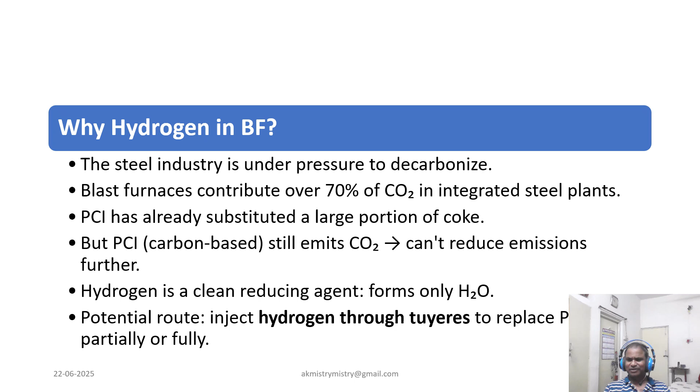This is where hydrogen comes in, and it's a clean reducing agent that forms only steam. The big question is, can we inject hydrogen through the tuyeres instead of coal and still run the furnace reliably? So this is a real challenge, and for this the study outcome is very important.

Now let's see what this study aims to do. This study focuses on one goal, which is about determining the maximum hydrogen that can be injected to replace PCI without compromising the furnace thermal or operational stability, because stability is all important when we start putting hydrogen.

It looks specifically at key parameters like flame temperature, top gas temperature, and internal reaction condition. These three factors become very important. So simulations were used to predict not just process changes but also the impact on emissions. The study assumed that coke rate and hot metal productivity are kept constant.

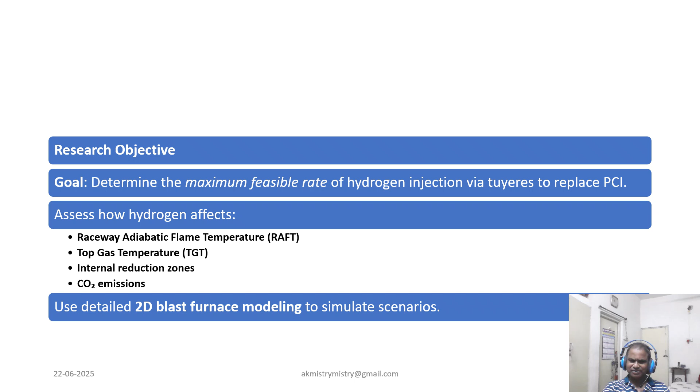Now coming to the methodology, the execution part of this project. So methodology in simple terms, we can say that this relies on two modeling tools. One is a heat and mass balance model to understand the energy and gas flow inside the furnace.

And secondly, a 2D global blast furnace model simulated the internal behavior like gas composition and the reduction of iron ore across the furnace cross section. So both activities together provide a detailed understanding of how hydrogen behaves inside the blast furnace.

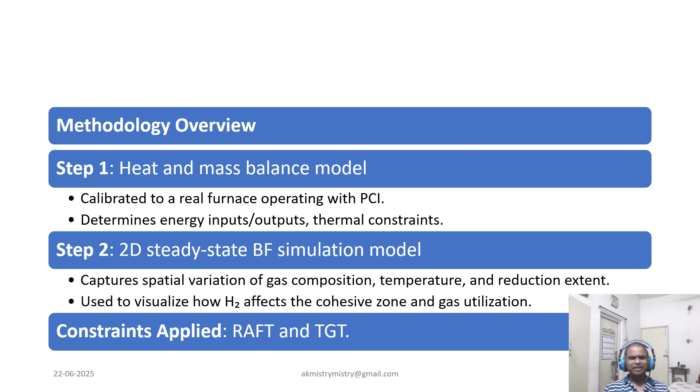Now coming to the matter of the constraints, two key parameters were monitored as constraints. One is RAFT and the other is top gas temperature. The RAFT needs to stay high enough for efficient combustion, as all blast furnace people know, and at the same time top gas temperature should not fall below around 118 to avoid dew point issues.

Initially oxygen is injected to keep flame temperature stable, but once top gas temperature hits its limit, that is about 118 degrees, any more hydrogen injection forces RAFT to drop further. And this is allowed within a safe limit of around 200 degrees. So this staged, constrained approach helps ensure safe operation.

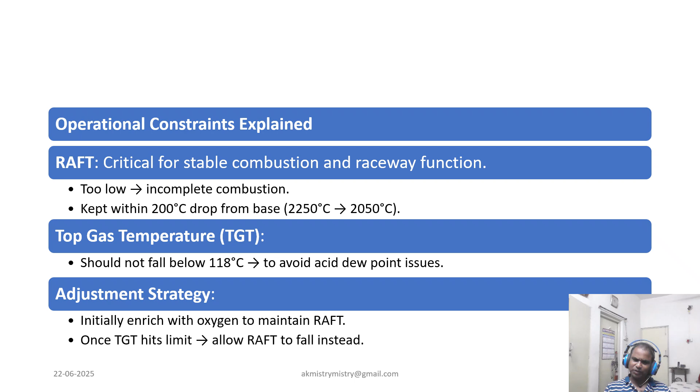So it is a challenge to keep the flame to the limit. At the same time, we have to keep our top temperature also within the range.

Now coming to how much hydrogen can be used. The maximum safe injection rate was found to be 19.5 kilograms of hydrogen per ton of hot metal. At this level, PCI is reduced to 37.5 kilograms per ton. Importantly, the productivity of the furnace remains unchanged.

It is around 7748 tons per day, which is assumed, and this parameter is kept fixed. To support this hydrogen rate, we would need about 151 tons of hydrogen per day, a significant scale if we compare with the production figure.

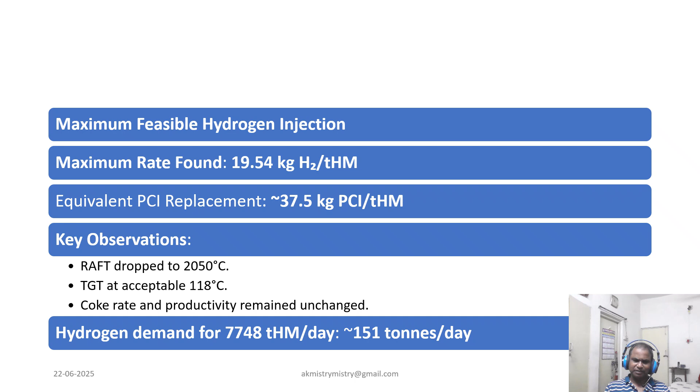So now coming to the direct emission reductions. So how much CO2 does this save? This is also a very important question. The base case with the PCI emits about 1.16 tons of CO2 per ton of hot metal. Now with hydrogen injection, this dropped down to 1.053 tons, that is a 9.5% reduction in direct blast furnace emission.

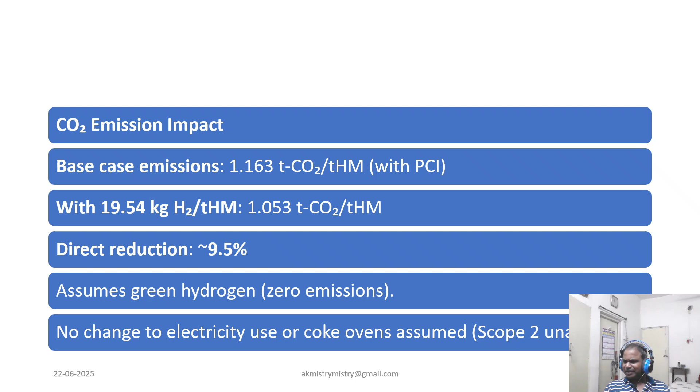This estimate assumes that the hydrogen used is completely green, making things more comfortable. Now coming to the source of hydrogen, this is also very critical. Not all hydrogen is equal when it comes to emission, and especially green hydrogen made using renewable electricity gives the best result, cutting emission by 9.5%.

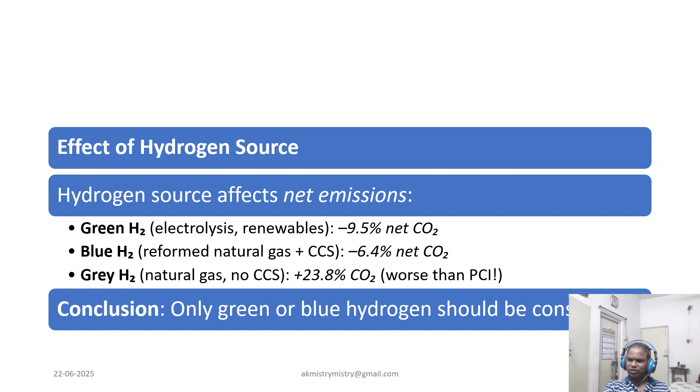Now let's have some focus on blue hydrogen, which is made from natural gas with carbon capture. It still reduces emission, but by a smaller amount, that is 6.4%. If we consider grey hydrogen made without carbon capture, it actually increases emission. So with this technology, to truly help the environment, the source of hydrogen must be green or blue. So while performing, this is also a lesson that is to be taken into consideration while executing the project: what type of hydrogen we are using.

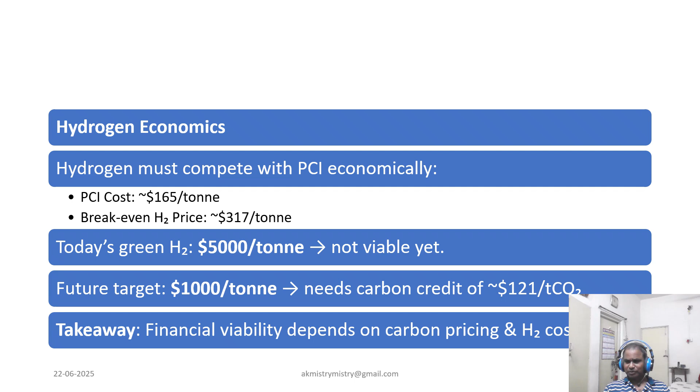Now let us see, can hydrogen compete economically? From a hydrogen perspective, PCI currently costs around $165 per ton. To break even, hydrogen would need to be priced around $317 per ton, much lower than today's green hydrogen prices, which are around $5,000. So future price drops could bring green hydrogen down to $1,000 per ton. And even then, we need carbon pricing or carbon credit of about $120 per ton of CO2 to make it economically viable. So we can see what the challenge is all about. It is very complex and it is challenging.

Now coming to what happens inside the furnace when this hydrogen passes in. The internal furnace behavior also changes with hydrogen injection. The reduction of iron oxide occurs faster, that everyone knows, and earlier in the furnace, meaning the cohesive zone sees a more rapid transition to metallic iron. This improves gas-solid contact and may enhance furnace efficiency. It also reduces the depth of the cohesive zone, potentially making burden descent smoother. So many activities are there, and while executing hydrogen projects, these things are to be very carefully studied.

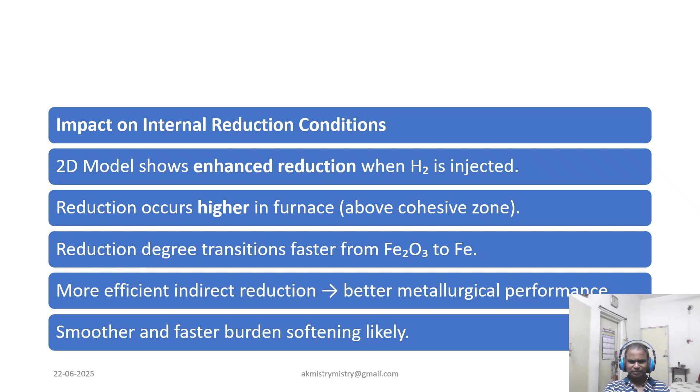Now coming to the low hydrogen utilization challenge, we can say that this is one of the biggest challenges, especially when hydrogen is injected in the blast furnace. Even at the maximum injection level, only about 50% of hydrogen reacts inside the furnace. This is the best value. The rest exits with the top gas. In real world trials, hydrogen utilization was even lower, as low as 38 to 42%. To improve this, the study suggests options like top gas recycling and modifying how hydrogen interacts with the burden.

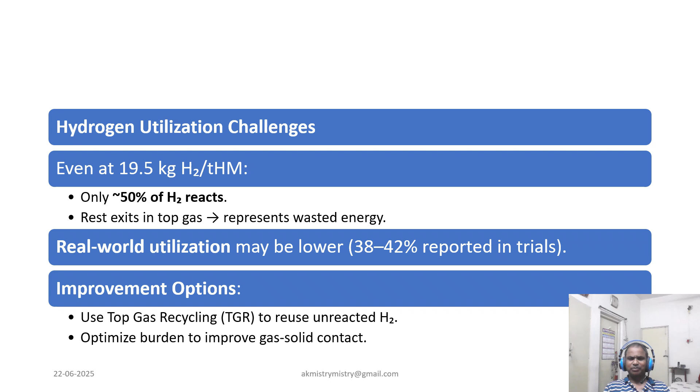So, the important thing is, what are the key takeaways? We can summarize this project in this way: yes, hydrogen can safely replace up to 37.5 kilograms of PCI per ton of hot metal. This leads to a 9.5% drop in CO2 emission while maintaining furnace productivity. However, hydrogen utilization is relatively low and current hydrogen costs are too high for widespread adoption. But with the right technology improvement and policy support, hydrogen injection could play a vital role in green steelmaking.

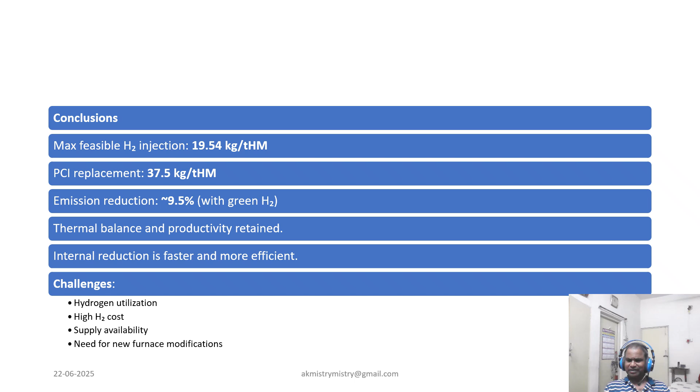So now coming to what next? Looking forward, we need to scale up hydrogen production and reduce its cost. Blast furnaces may need redesign to improve hydrogen utilization, for example, using top gas recycling or a hybrid shaft BF system. We can also combine hydrogen with oxygen enrichment and bio-based injectants. Digital optimization and carbon pricing will be key enablers. Together, these steps can pave the way for a truly low carbon future for iron and steel.